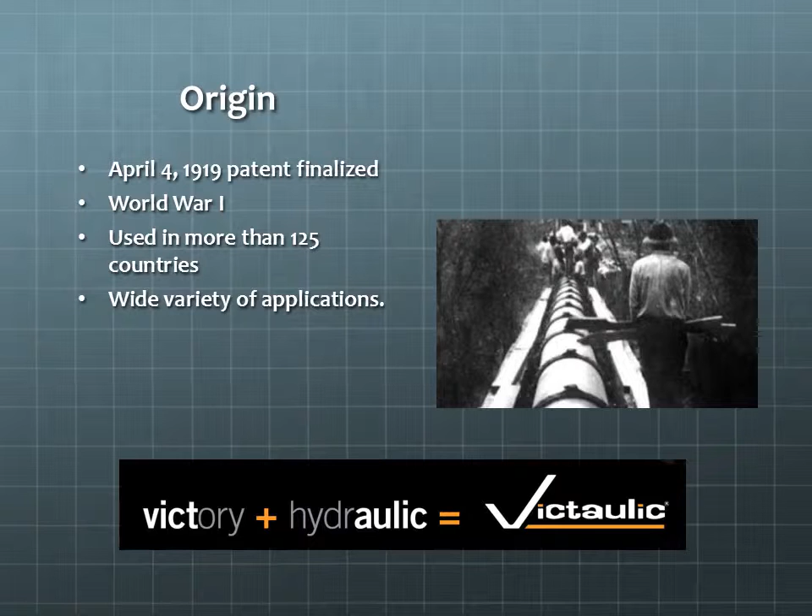A pipe coupling provides a method of joining the ends of two pipes together. The preferred pipe coupling system is the Victaulic coupling. The Victaulic pipe joining system provides a flexible pipe joint while allowing for expansion, contraction, and deflection. The operating temperature is dependent upon the gasket and/or the seal selection, while providing a reliable method of joining the pipes together in a cost-effective way for a wide range of uses.

The easy assembly of the coupling system allows for time and labor-saving costs associated with installation. By reducing the time and cost, the Victaulic pipe joining system provides an effective alternative to welding and flange connections. The pipe joining system can be used for different types of fluids and at different temperatures and pressure ranges, depending on the application. For example, the coupling system can be used for heating, ventilation, and air conditioning systems in regards to facilitating the flow of air. On the other hand, the coupling system can be used in the transportation of oil at high temperatures and pressures.

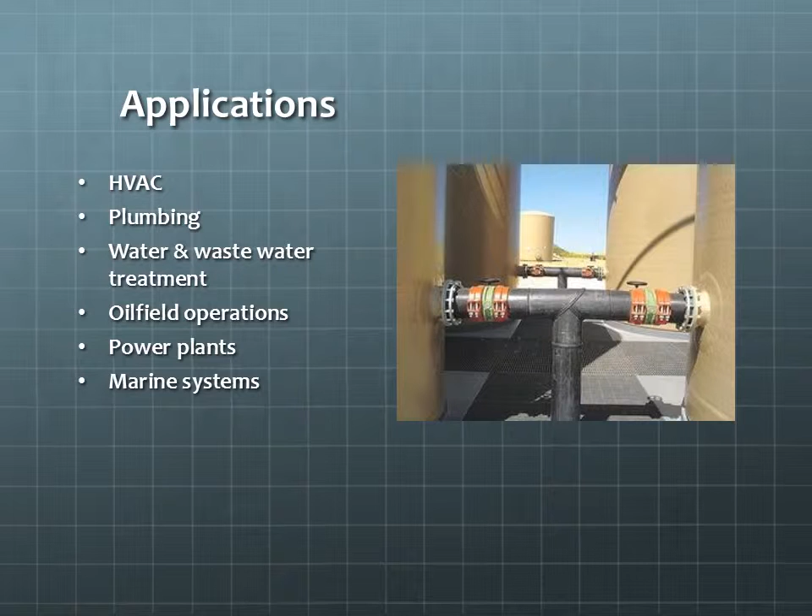The Victaulic system is comprised of 4 elements: grooved piping, gasket, coupling housing, nuts, and bolts. The benefit of the system: the Victaulic grooved system for joining pipes is 3 to 5 times faster to install than welding, and it's easier and more reliable than threading or flanging pipe, resulting in less installation time and easier replacement of piping components. Plus, the new line of installation-ready couplings is twice as fast as existing groove couplings, with no loose parts to disassemble the coupling quickly.

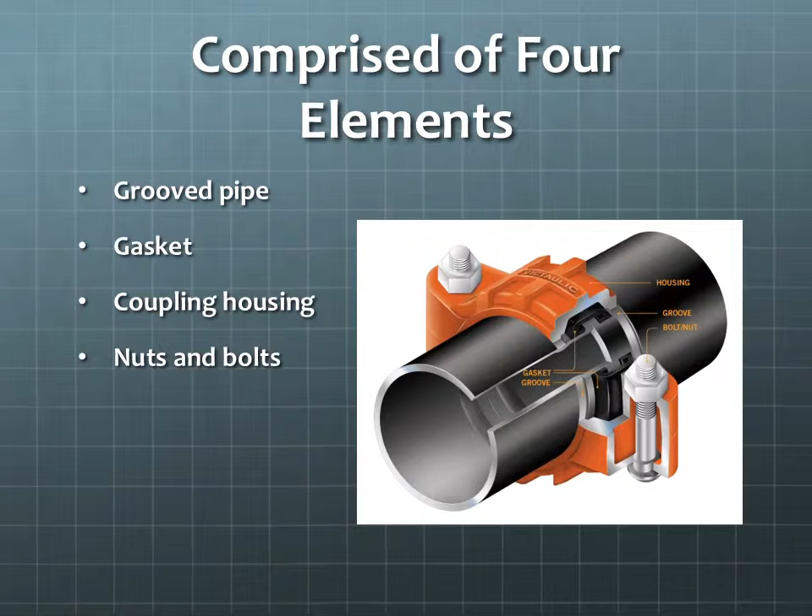A cutaway cross-section of a Victaulic pipe connection can be seen here. Couplings usually consist of 2 standard bolts with heavy-duty hex nuts that can be installed using hand tools or a power impact tool. Upon inspection, grooves can be seen cut into the surface of the pipes that will be joined. It is in these grooves that the Victaulic coupling housing sits.

Tightening the bolts and nuts engages the housing keys into the grooves, allowing the housing to grip the pipes, keeping them from sliding laterally. The surface of the 2 housings must meet solidly between the head of the bolt and the securing nut, which will provide visual confirmation of a proper assembly and joint integrity once the nut is properly torqued. The cutaway also shows the placement of the gasket held within the Victaulic pipe system.

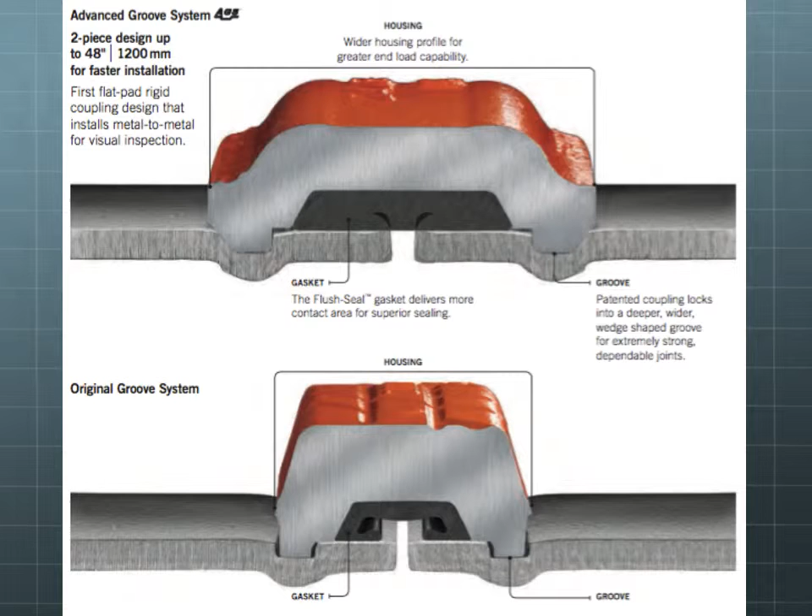The coupling clamps fully encompass the gasket and provide mechanical strength to the pipe joint. As the bolts are tightened on the housing, the gasket is compressed, creating a compression seal around the connected pipes. This seal keeps any gas or fluid moving within the piping system from escaping.

Piping systems in earthquake-prone areas can be exposed to forces and deflections beyond normal static conditions. This causes the pipes to fail when these new forces exceed the piping system's capability to accommodate this change. The Victaulic system provides many mechanical design features that are useful in systems exposed to earthquake conditions. This is due to the Victaulic flexible coupling's native ability to attenuate vibrations and sound throughout its structure.

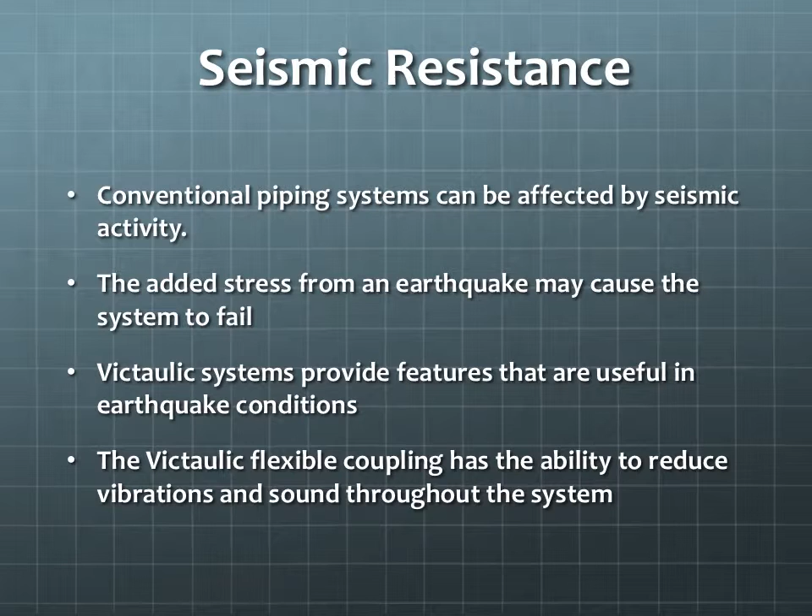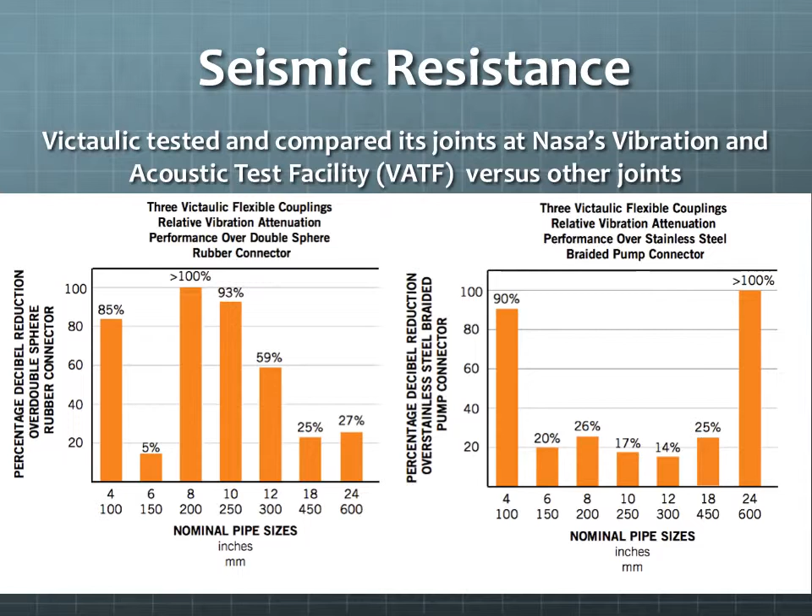Victaulic flexible couplings, such as styles 75, 77, 177, and 177N, just to mention a few, allow for controlled pipe movement within the coupling while maintaining a positive seal and self-restrained joint. The design permits expansion, contraction, and deflection generated by thermal changes, building or ground settlement, and seismic activity.

The couplings minimize noise and vibration transmission generated by pumps or other equipment to the piping system because they are not rigidly fixed to the pipe, as opposed to welded and flanged or threaded joints. Also, the elastomer gasket within each coupling and the pipe end gap attenuate system vibration. The continuous use of Victaulic couplings throughout the piping system will furthermore reduce the transmission of vibration.

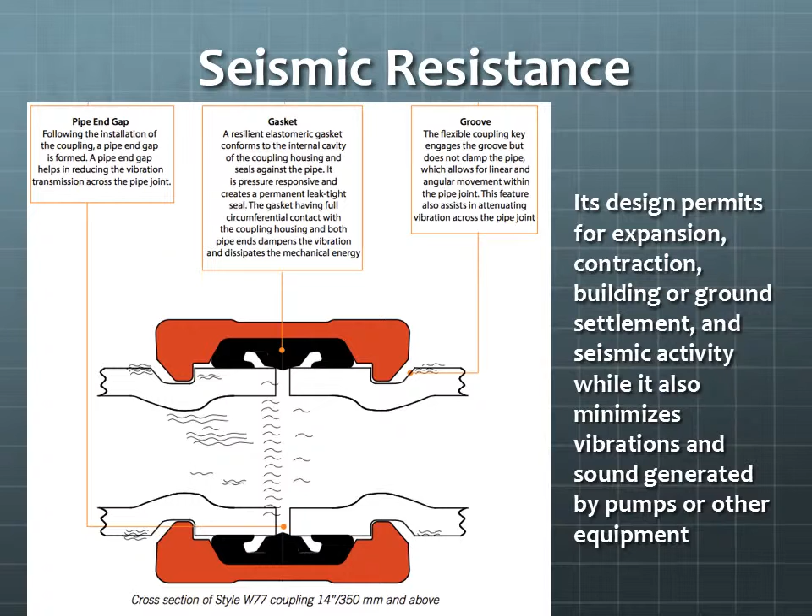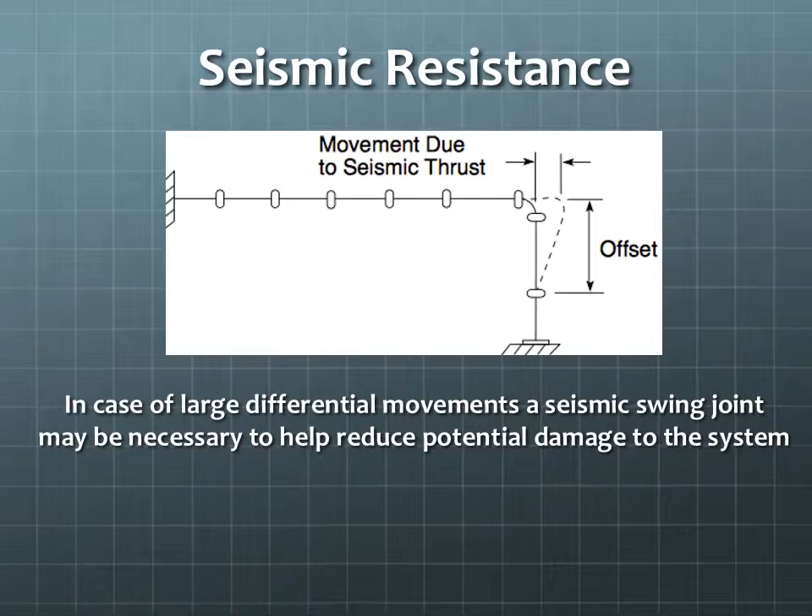As we have seen, the Victaulic joints have an innate ability to damp vibrations. While this helps the system resist damage from light seismic movement, sometimes in case of anticipated large differential movements between piping, it may be necessary to use a seismic swing joint. These joints allow for simultaneous movement in all directions, which adds flexibility to the system, helping reduce pipe stress and potential system damage.

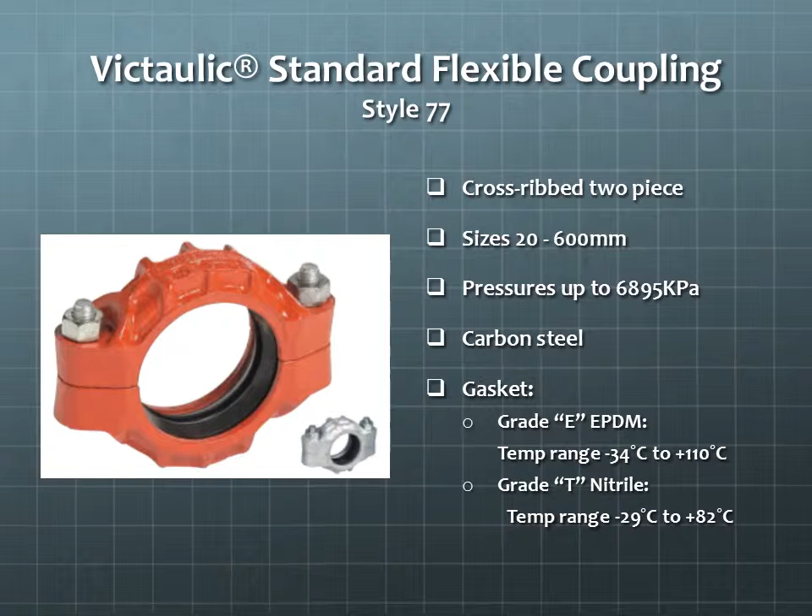The gasket to be used will depend on the temperature. Grade E is suitable for temperatures between negative 34 degrees Celsius and 110 degrees Celsius, while grade T is suitable for temperatures between negative 29 degrees Celsius and 82 degrees Celsius.

Victaulic's specialty is in grooved system technology. They offer a variety of fittings that serve as alternatives to welding, threading, and flanging to join two or more pipes together. They offer everything from fire protection systems to couplers, elbows, crosses, and other fittings used in the gas and oil industry. The fittings offered have different types of schedules, meaning the thickness and the quality of the pipe, to be able to handle the strong pressure and strains that a pipe would stand in its lifetime. They can also vary in the materials they're made of, depending on the project and the purpose of the pipe, from copper to stainless steel to lined and coated fittings.

Some of the most advanced fittings and couplers that they offer are patented as advanced groove systems, which are the strongest Victaulic mechanical assembly in its class, which revolutionized the fire protection industry. Other options include the installation-ready fittings, which are meant for copper and steel mechanical piping systems. Victaulic also introduced an expansion joint coupling known as Style 152A, which is meant for pulverized coal boiler feed lines. Their flexible installation was introduced during World War I for the soldiers to use in the battlefield to repair main pipelines without the use of welding or soldering.